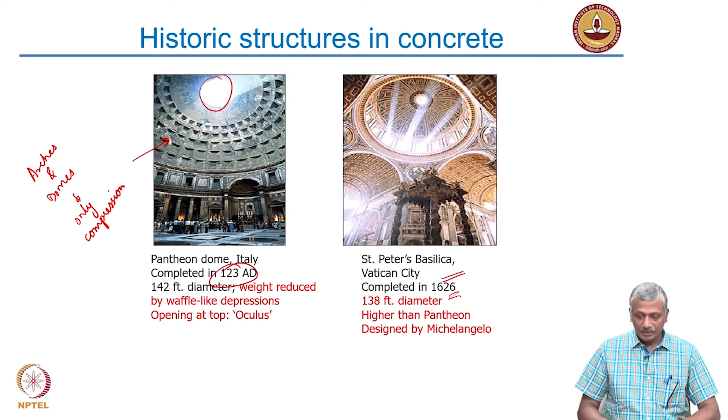In many of the Western countries, people build their own homes. They just go to a market and buy wood and come back. They have good training in carpentry and all that, and they actually do the design of the entire superstructure on their own. They only get concrete and stone for the foundation, fill it up, and then they do the entire structure on the top on their own. People build their own houses. That is because wood is such an easy material to build with. If you have understood the basics of carpentry and jointing, you can do a very good job with wood for construction.

Only problem with wood is obviously moisture, fire resistance. Moisture can damage the wood and change its properties significantly. If you have not seasoned it well enough, it will start warping and changing its shape. Fire resistance is an obvious problem with wood, and of course, biological growth. You will have easy biological growth, and also wood can give place to all these insects like termites, which will end up totally degrading the quality of the material.

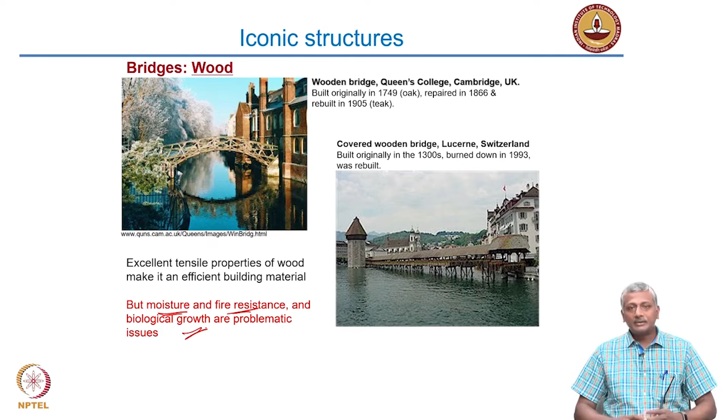Brick is essentially made with clay. Silica, alumina is in plenty. So, if you have the porosity and the water availability, plants can grow quite easily on masonry structures. So, this is a common problem. Biological growth is a common problem in masonry structures.

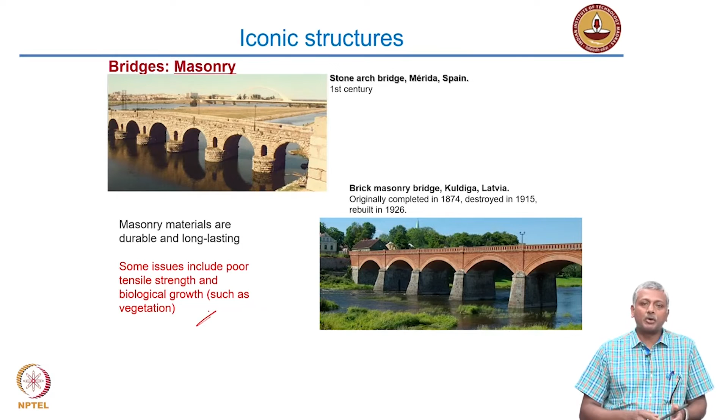Steel, many of our old railway bridges are completely made with steel. Many of the world's tallest skyscrapers are also made with steel. Of course, not the tallest one, I will come to that in just a minute. So, steel, excellent strength and ductility make it a very good material for construction. Ductility means steel has the capability of deforming significantly before it actually fails.

In structures, we want to design structures that are durable and ductile. We want them to be ductile because any indication of failure should be slow and long, so that people realize that there is something wrong going on and get to safety before the building collapses. If you build a structure which is brittle, it will collapse suddenly, and that will lead to loss of life.

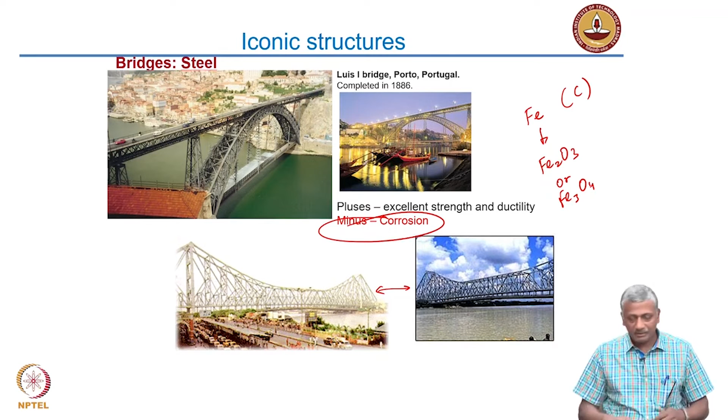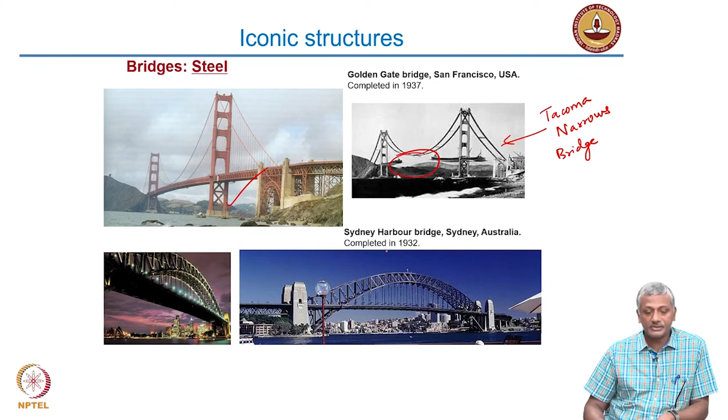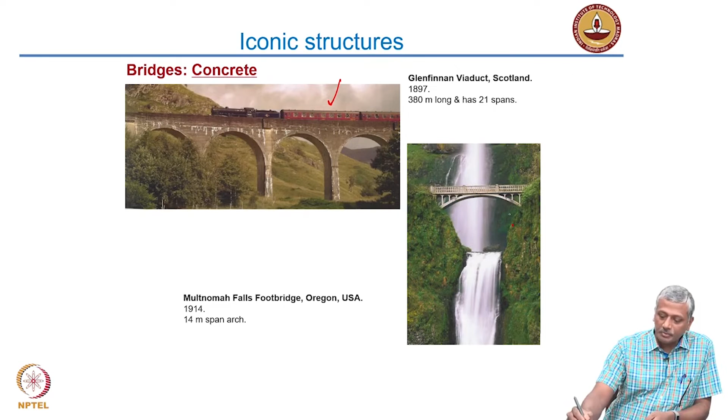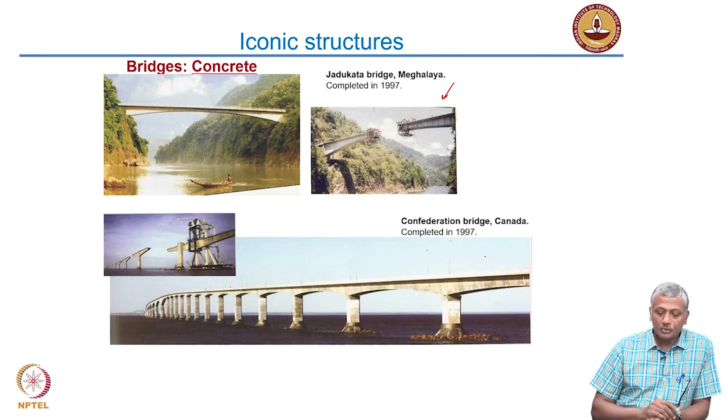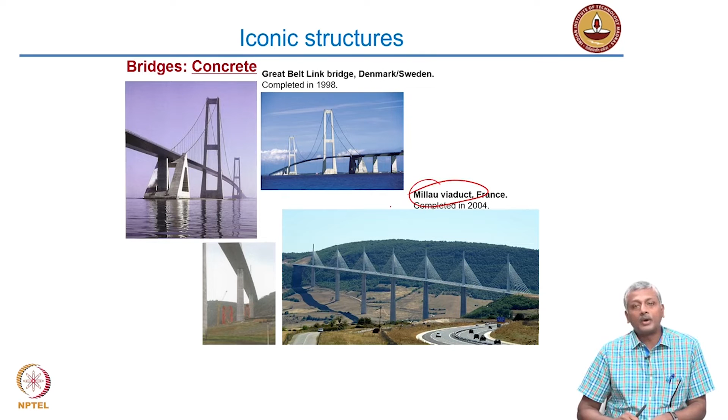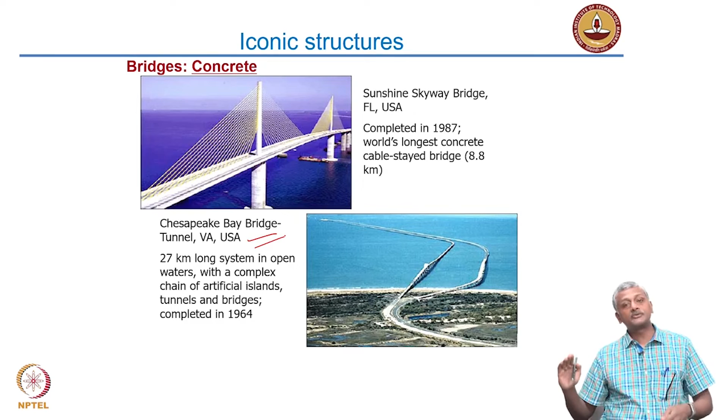There are several other examples like the Sunshine Skyway Bridge, which is shown here, and this Chesapeake Bay Bridge Tunnel. This structure is partly a bridge and then becomes a tunnel and then comes out again as a bridge.

Composite structures are today being used quite extensively in making bridges and pipes. Okay, this is an example of a concrete pipe where carbon shells are filled with lightweight concrete and sometimes even used as a girder. A girder is basically a beam, right. You can see here a glass fiber reinforced polymer deck.

All the cavities indicate that the weight of the structure has been reduced because the ribs themselves are strong enough to bear the load. Okay. And this example is of a stormwater channel bridge made with a composite structure out of this glass fiber reinforced polymer deck. So, composites basically work on the synergy that you get from different combinations of materials.

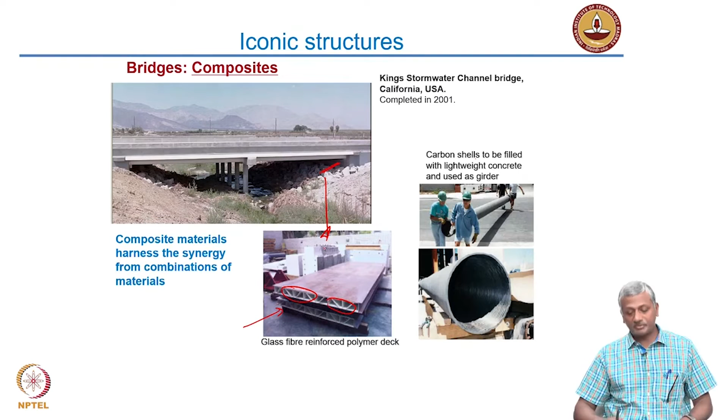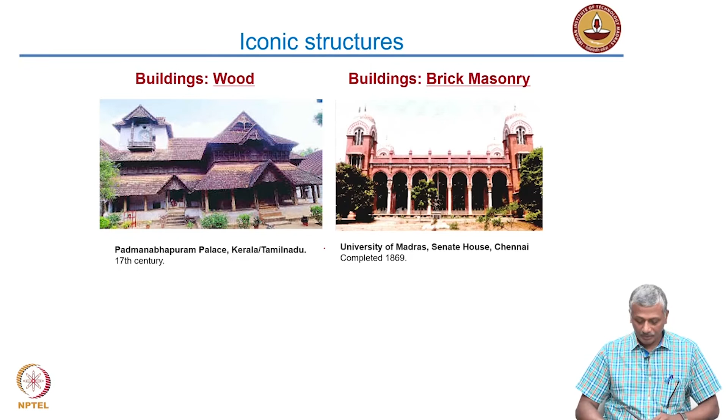Wood buildings of course are all over the world. In India also you can find quite a few examples. These are examples from Kerala and from Tamil Nadu. Stone masonry, common examples, you have buildings made with stone masonry like the Qutab Minar. Buildings made of concrete, lots of examples are there.

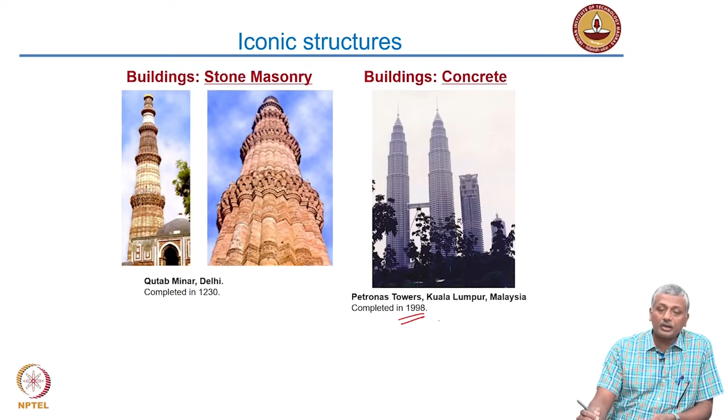The Petronas Twin Towers in Kuala Lumpur, an iconic landmark of the world. Burj Khalifa, everybody knows about this now. In 2010 it was unveiled as the tallest building in the world. Interestingly, it has concrete up to about 600 meters and the remaining part of about 228 meters is in steel.

The interesting fact is that the concrete part, which is up to 600 meters, costs less than the steel part that is forming only the last 228 meters. So, you can just imagine the kind of impact. Material cost, I am saying, is lesser for the concrete part that is in the 600 meters below.

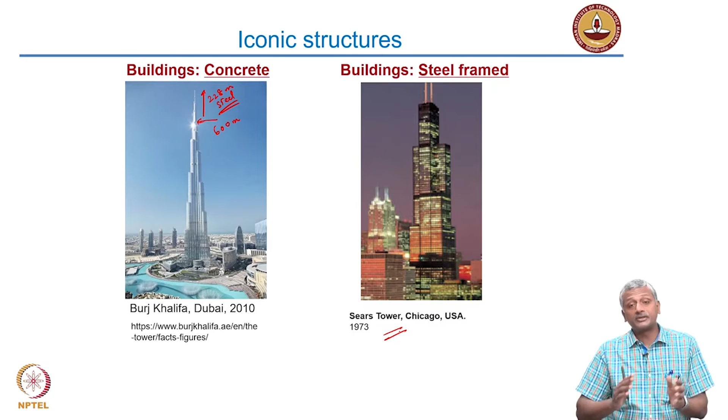And this is actually a steel frame building, Sears Tower in Chicago, a very famous building also. And as I already said, the Empire State Building is steel. The World Trade Center Twin Towers in New York that were brought down by Osama bin Laden's planes crashing into them, they were also steel structures.

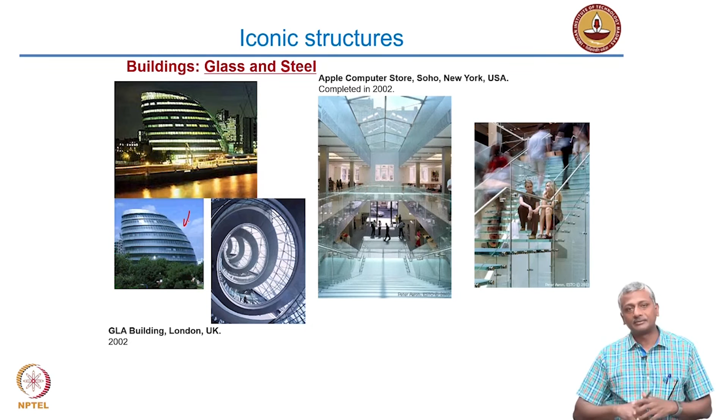Okay, so modern buildings also use a lot of glass along with steel. You can see the intelligent use of glass to provide a good quality aesthetic appearance. And this is what I was talking about. Here, of course, you have glass and steel combined to make a nice structure, but sometimes what we have in India are regular concrete, reinforced concrete structures which are simply cladded with glass. So, those are not really the same as composite sort of a construction.

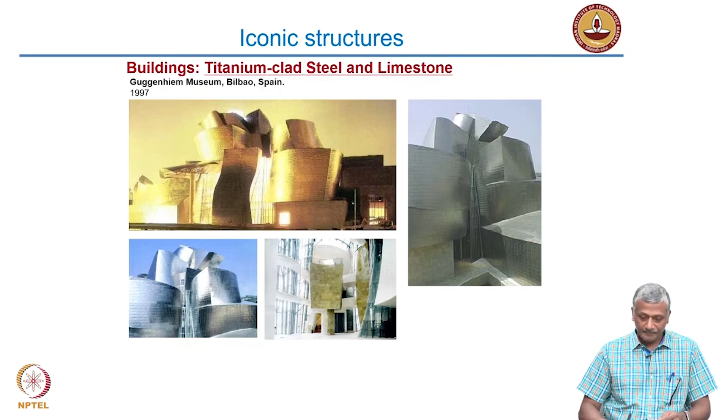Here, this is a titanium clad steel and limestone which has been used in the Guggenheim Museum. Again, iconic structure, many of you may recognize it from the pictures that are shown here. Dams and concrete, of course, are all over the world. Most popular ones being the Hoover Dam and the Aswan Dam in Egypt.

So, I have shown you examples of several structures. There are obvious reasons why some materials made it to these structures, why they were used there and so on. But as far as how we think about the usage of materials in future, what are some of the things that we need to start thinking about? One is the dwindling resources.

We want to make a lot of structures with concrete. Concrete utilizes a lot of cement, stone and sand. Where do we get these quantities of stone and sand that are required to produce the concrete? How do we produce so much cement? Cement depends a lot on limestone. If limestone is available in such quantities or not, we have to find that out, right?

We have to conserve the existing resources and start using alternative materials to reduce the impact or the burden on the earth where we are mining for these resources, okay? Because we are changing geology significantly by mining the resources, we are adversely impacting the environment significantly.

In some cases, like the choice of materials like concrete, we have heterogeneity in the material, right? We have materials which are combining different sizes. Cement is a powder, stone and sand are particles that are of different sizes. We are combining all this in a matrix with water, and this becomes a composite, and because of this we get heterogeneity and unpredictability in terms of the performance, okay. So, that is something that is a challenge, and material scientists or concrete technologists have to learn how to mitigate these challenges.

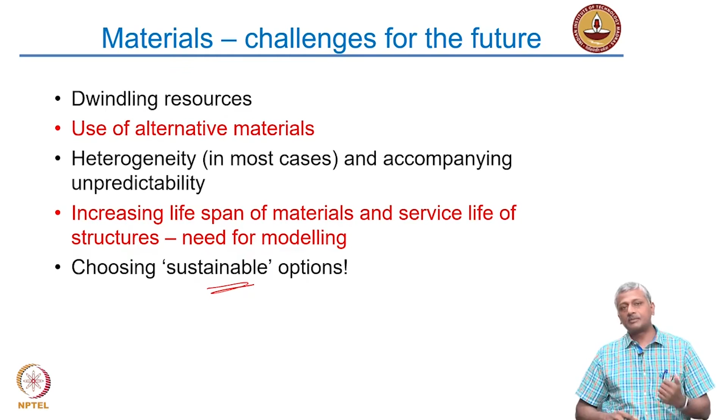So, as future engineers, you may have to use some of these terms quite frequently. Carbon credits, this is a term that you come across quite often today, or carbon tax in some cases. So, carbon credits means a technology that evolves less carbon dioxide and less energy essentially gets carbon credits. The technology that is poor in terms of carbon dioxide emission will be taxed heavily. So, that is a carbon tax.

Green rating I already talked about. Most buildings today have green ratings which they get from different certifying agencies. Essentially, this rating is dependent upon how the choice of materials and the technologies for construction have led to a low energy in the building as well as a low CO2 emission.

If you do a Google search for net zero energy buildings, you will find a lot of very interesting examples. What is net zero energy building? That means a building that has consumed so much energy to be brought up and will consume so much energy during its life cycle. But at the same time, the same building is capable of producing an equivalent amount of energy over its entire life cycle. That means the usage and production of the energy sort of cancel out. So, that is a net zero energy building concept.

The embodied energy, again a concept that you will come across very often today, basically talks about what amount of energy it took to actually bring the material to the current state in which it is servicing in a given structure. Life cycle assessment, again a common term you hear today. Life cycle assessment deals with assessing how over the entire life cycle of the material or the structure your impact will be on the environment, on the economy, on the society.

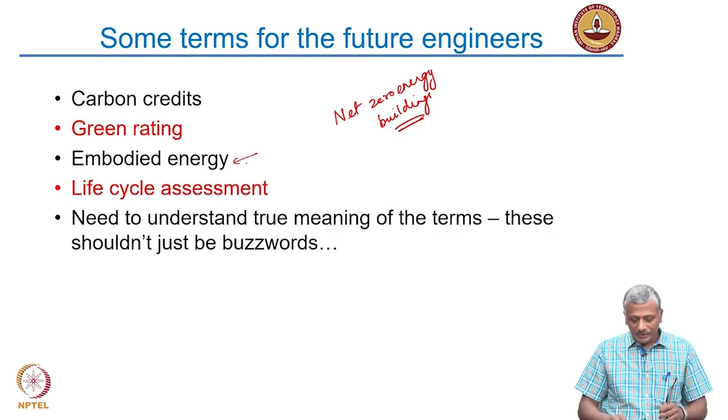Okay? So, with that we come to the end of the introductory part. I will just quickly summarize what I talked about. I said materials technology today is at a very exciting stage. We are talking about a completely different perspective with which we actually see these materials. We look at conventional materials that are getting modified for different applications, right? And with the advent of modern materials, we are able to now combine characteristics which previously were not achievable with conventional materials. So, in summary, civil engineering is no longer a brick and mortar profession.

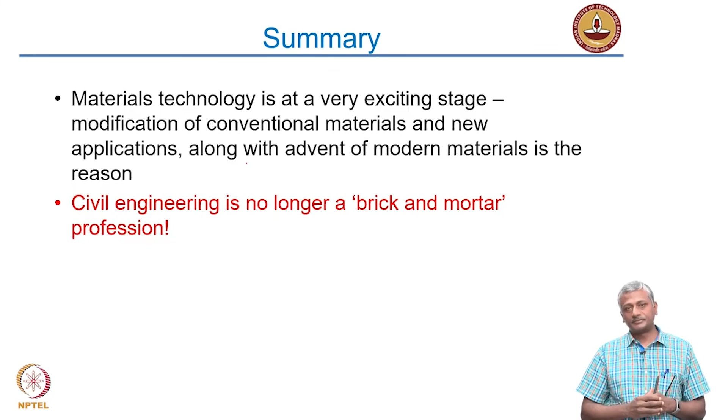There are several challenges which are going to consume a lot of time of high quality engineers all over the world, and you should be one of them too, right? Okay, so with those words of an introduction, let me talk about what the learning objectives are in this particular course. So, this course is about construction materials. So, the first and foremost objective is obviously to understand the basic structure and properties of construction materials. We have to be able to also list and classify the different types of materials based upon their unique properties and applications. We will also look at construction methodologies with these materials.

So, how do you actually build out of masonry? What kind of arrangements do you have for the blocks? How do you build with reinforced concrete? How do you build with pre-stressed concrete, and so on. Then understanding finally the impact of material properties on their long-term performance. How does the choice of a certain type of ingredient affect the way that the material will behave in the long term, and how will it affect the overall life of the structure? So, that is something also we will talk about in this course.

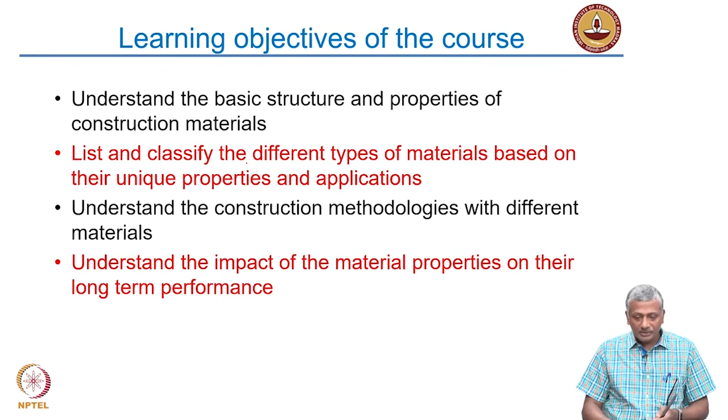Okay. So, just to give you the idea of course contents, the next few lectures will be by Dr. Radhakrishna Pillai on structure and properties of materials. Then from my side, I will talk first about stone, brick and mortar, essentially masonry materials, and then I will talk about cement and concrete. This will be followed again by Dr. Pillai talking about steel, aluminum and copper, and I will then talk about polymers, plastics and composite materials.

The last two segments, one is by Dr. Pillai on wood and glass, and then the final segment will be on pavement materials. Essentially, I will talk more about bituminous concrete, and I will also briefly touch upon the use of cement concrete for pavements. Okay. So, I hope that this course will be extremely useful to you. As I said, it builds the fundamental foundation on which you are going to be moving forward with the higher level courses in civil engineering.